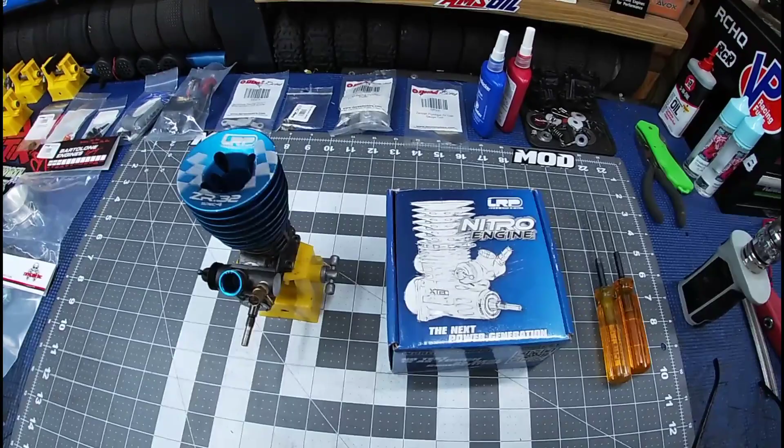For today, we're going to be breaking this down. This is the original LRP .32 Spec 4, stock, not modified, and this is the brand new LRP .32 Spec 4.1, stock, not modified. Let's open them up, see the differences. This is supposed to have an upgraded conrod, upgraded piston, and a turbo head with a better carburetor. So we'll take a look, see what's going on. See y'all in a few minutes. Peace.

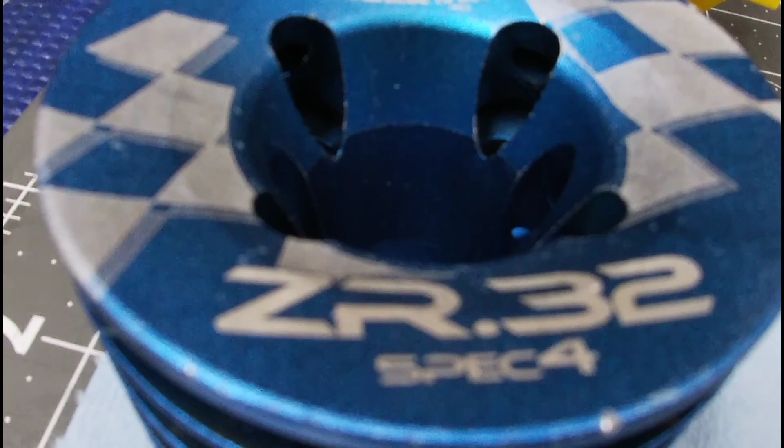People, let's check out the differences between the old LRP ZR .32 Spec 4 and the brand new turbo headed ZR .32 Spec 4.1. I know there are some differences, one major one being the turbo head, but we're going to check it out here in a second.

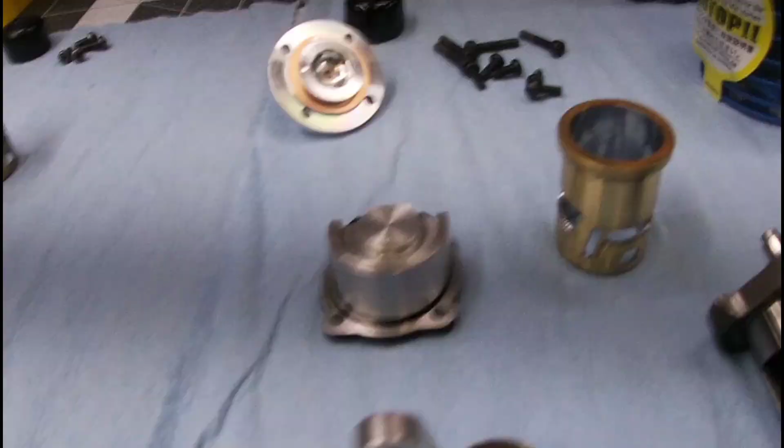All right, people, let's check it out. So what do y'all want to start with? Let's start with the cranks, man. So here's the old crank right here. Pretty sure the cranks are about the same, to be honest with you.

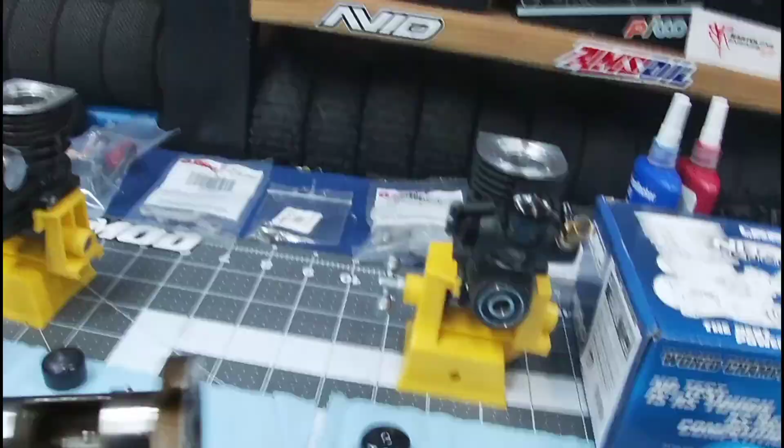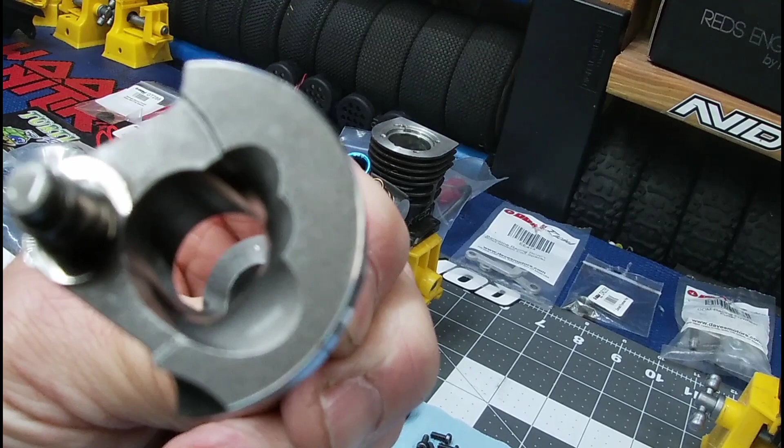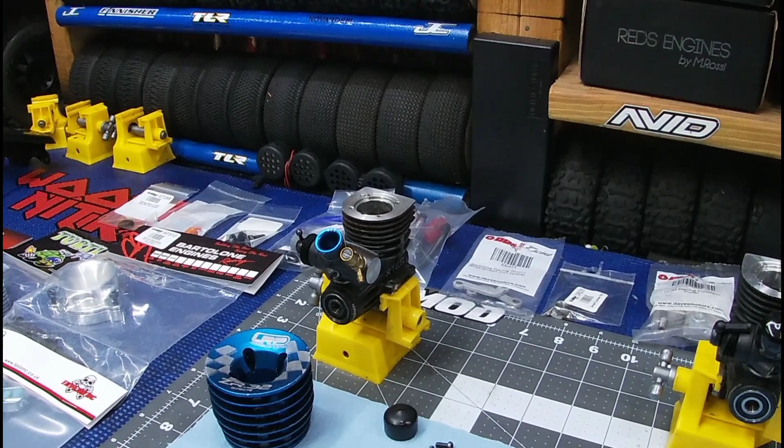No crank fill, nothing like that. It is ramped though. There's the new one. It's supposed to have an advanced timing on it. They look pretty similar to me, to be honest with you. Almost looks like the barrel. They're pretty much exactly the same on the cranks.

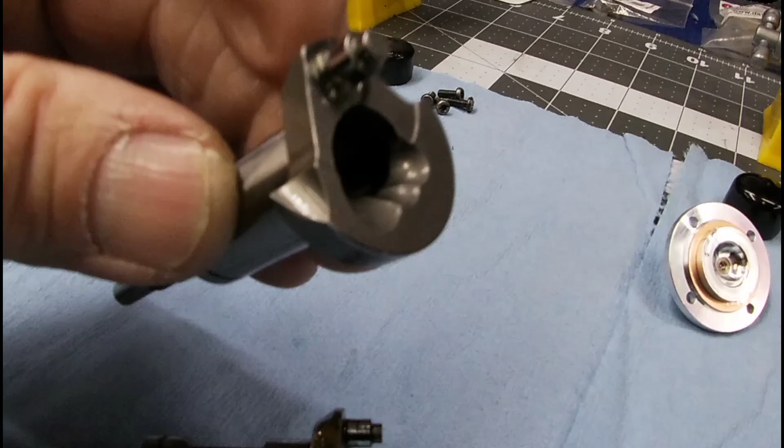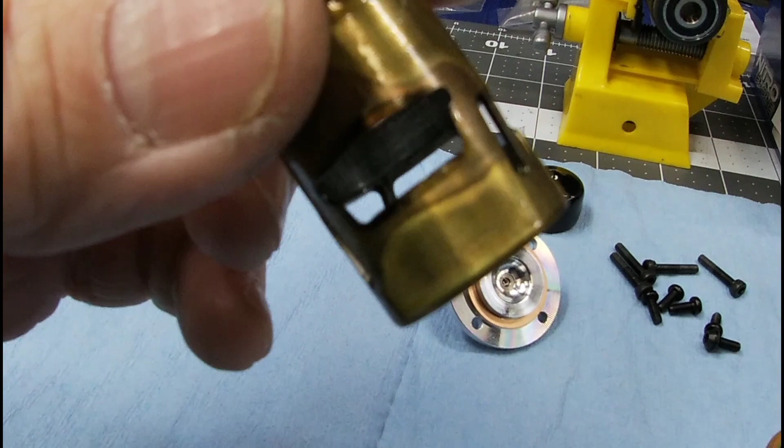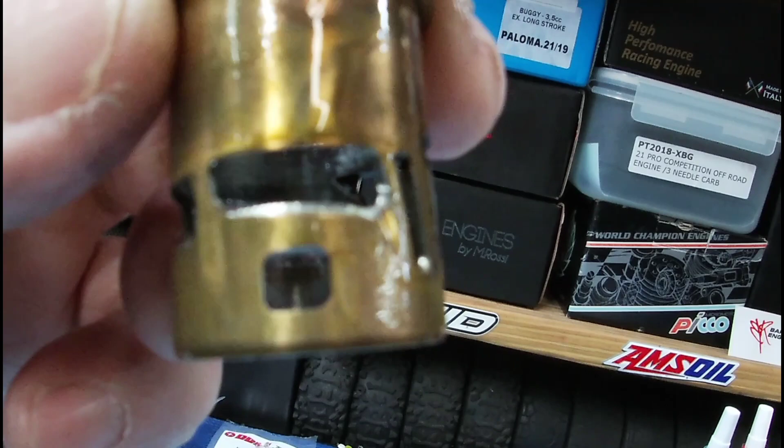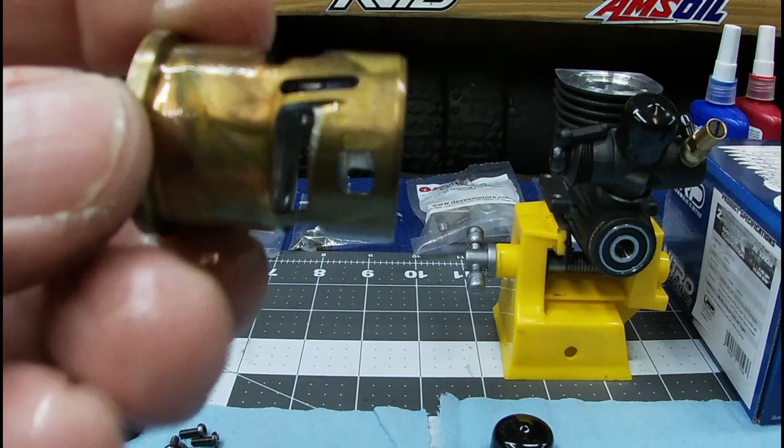All right, let's look at the old sleeve. This one's a stock one. It's got some pretty jagged edges in there. Yeah, I see a lot of burrs, man, a lot of burrs. Let's take a look at this one. Maybe cleaned up a little bit, but I still see some burring in there.

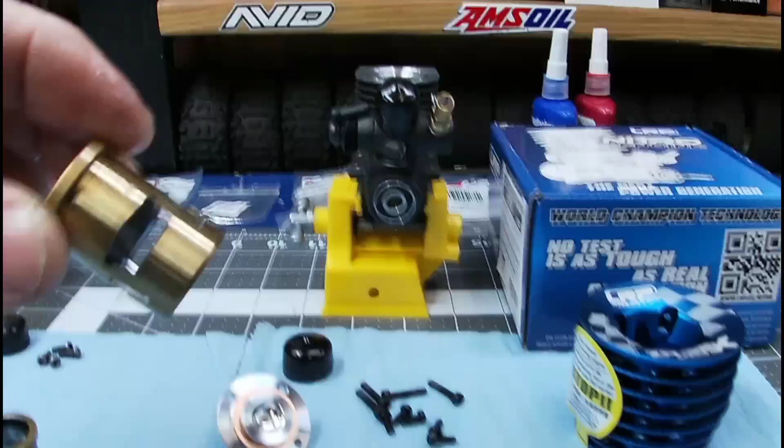Alright, back plates. It's the old one. Pretty much the same. Same thing.

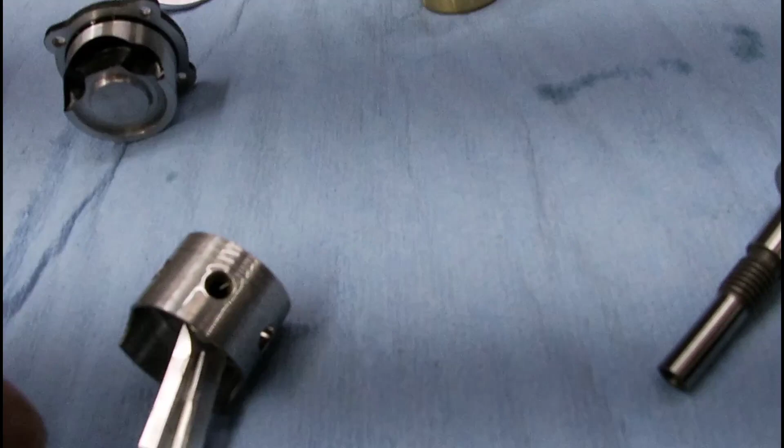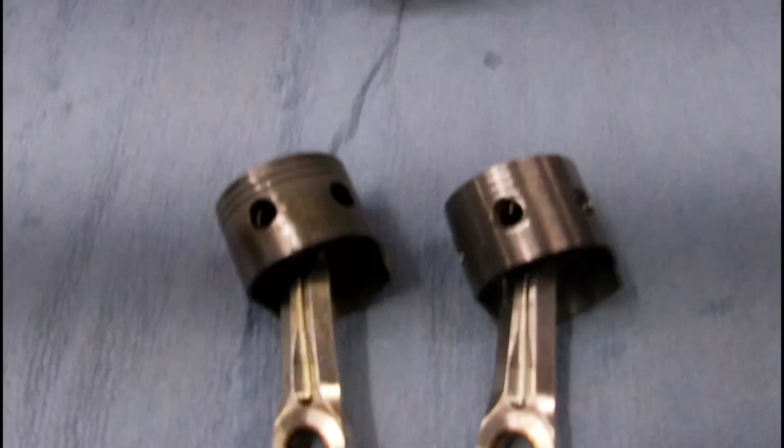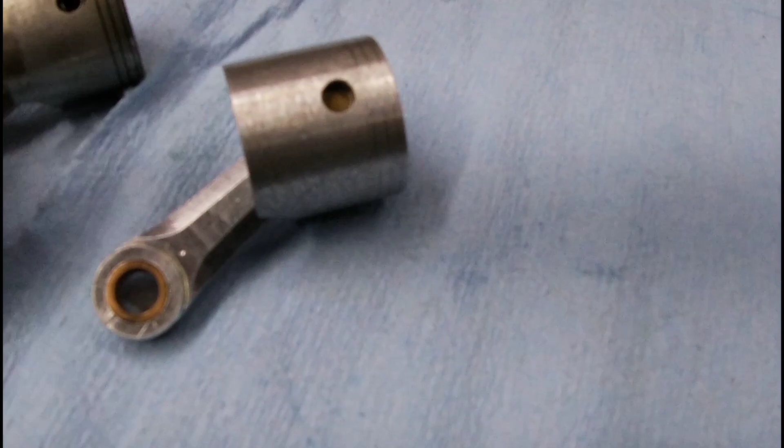Alright, let's look at this piston, conrod - and it's a big piston, man, look at that. They look pretty close, man. Maybe a different type of material.

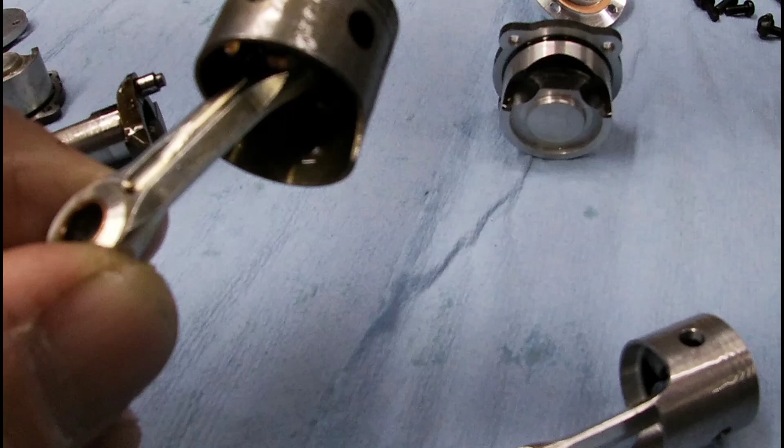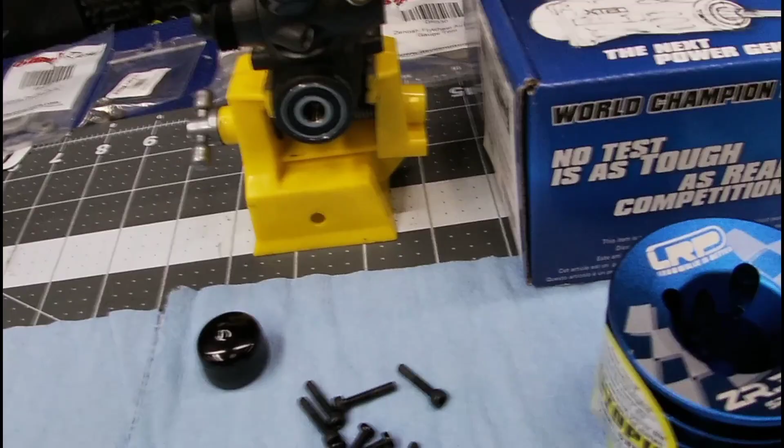Alright, and of course the turbo head, major change in this thing. It's running a number 5 plug. And of course, this one is just the regular standard glow plug, which I've had great luck with these, man. And the head is the same for sure.

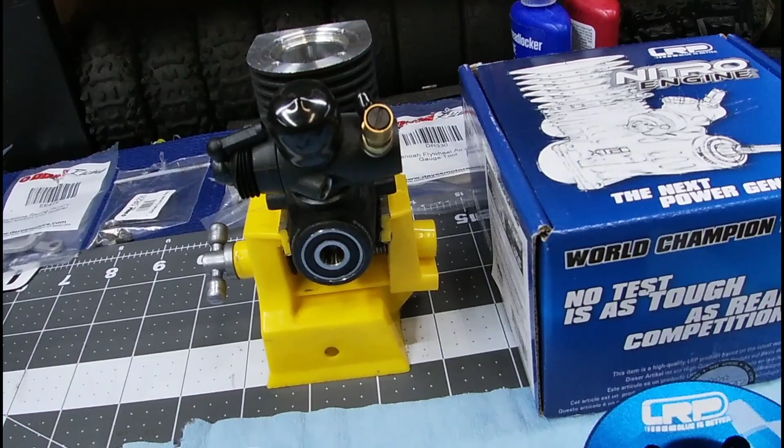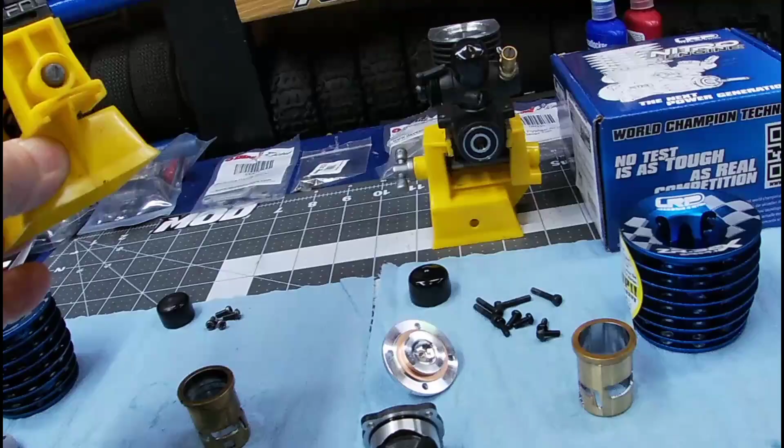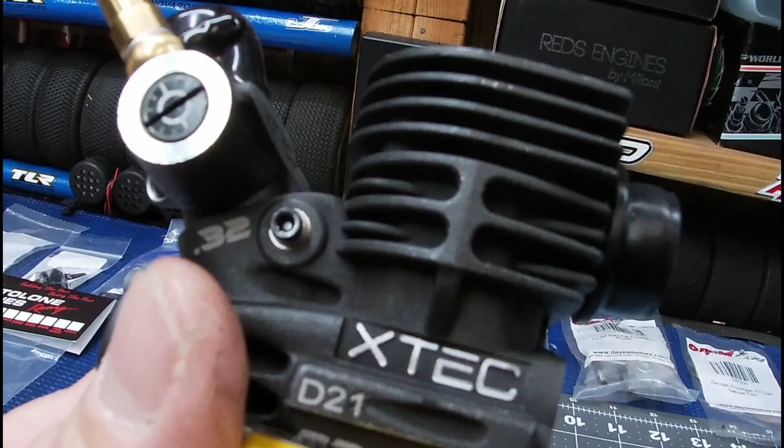So let's look at the block. There's some changes in the carburetor. So you guys know what the old block, the old carburetor, it's just a 2-needle carb. The new one, there's your 3rd needle right there, it's got the tick marks on it. That really looks like the exact same carb with just a 3rd needle. But we'll see - I think we're going to try and run it with the stock carb.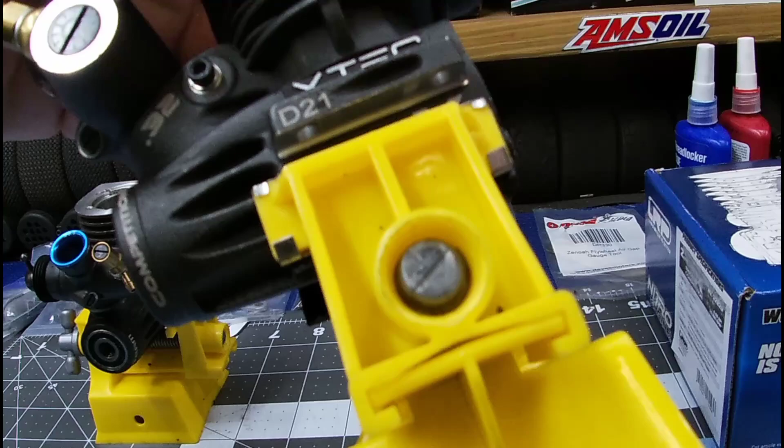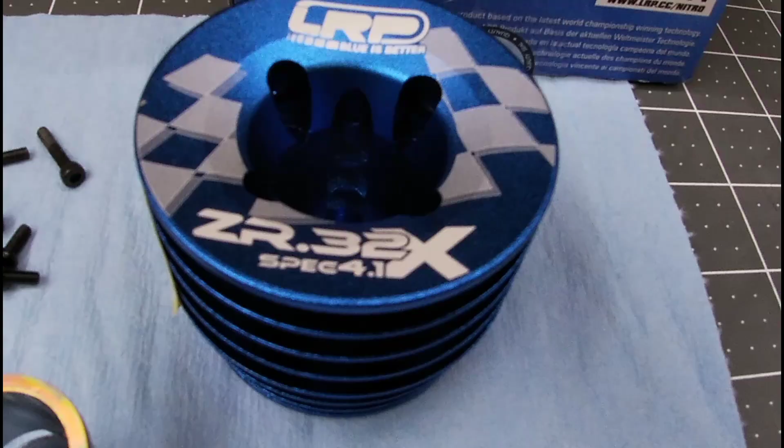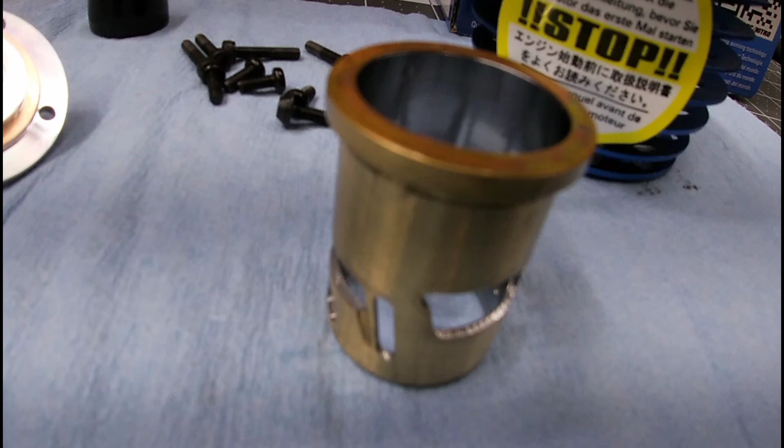They're really nice looking engines. It's a really beautiful head, milled out, lightened. But I'll be honest with you, other than a couple little things, the turbo head, and the third needle on the carb, I really don't see much difference, man.

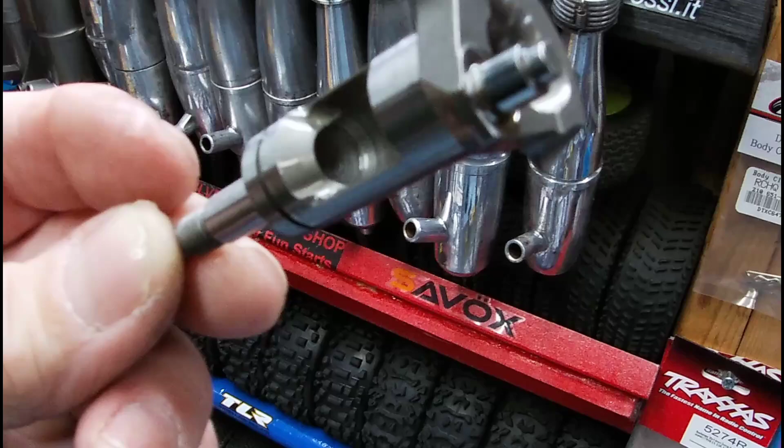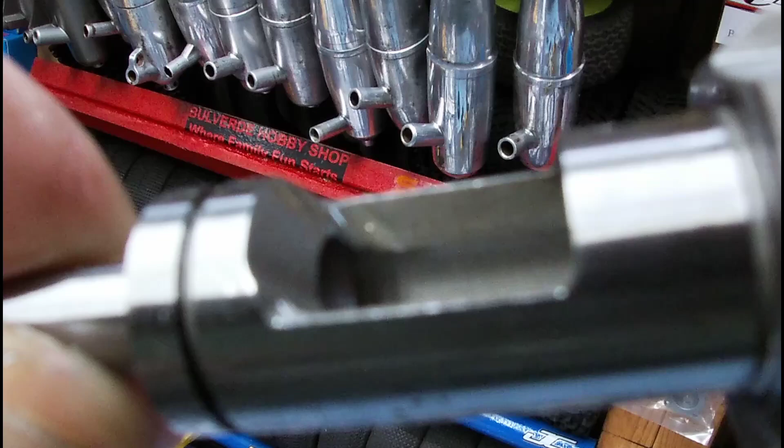That dang piston is huge, man. So we are going to get this thing modified, which will open up the timing. I think I do see a little bit more - yeah, I don't see much cut there in the timing area on the old one, a little bit. Looks like this one's been opened up a bit more, but pretty damn close to the same thing.

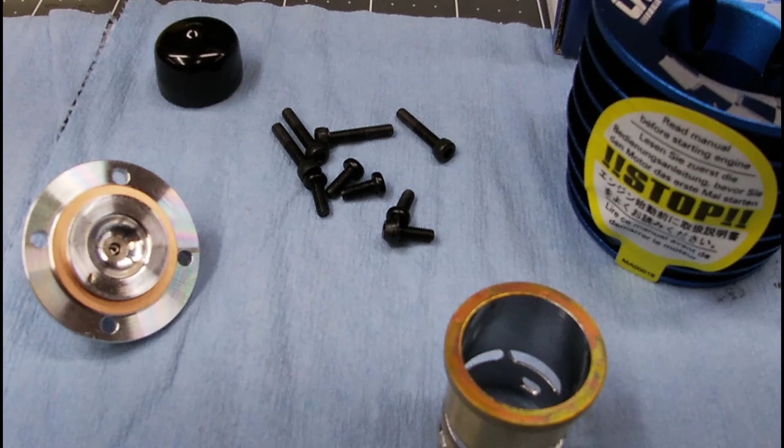But at least we got a turbo head on there, we can run different turbo head plugs. I'll probably run the LRP Platinum Iridium number 5 to start out with this, and let's see what it actually calls for.

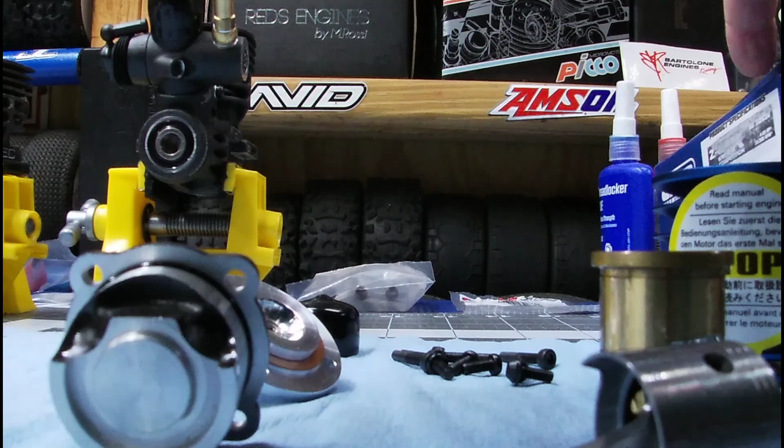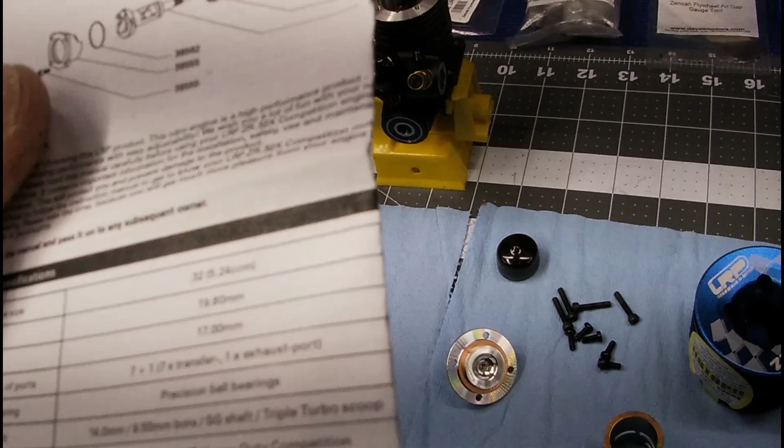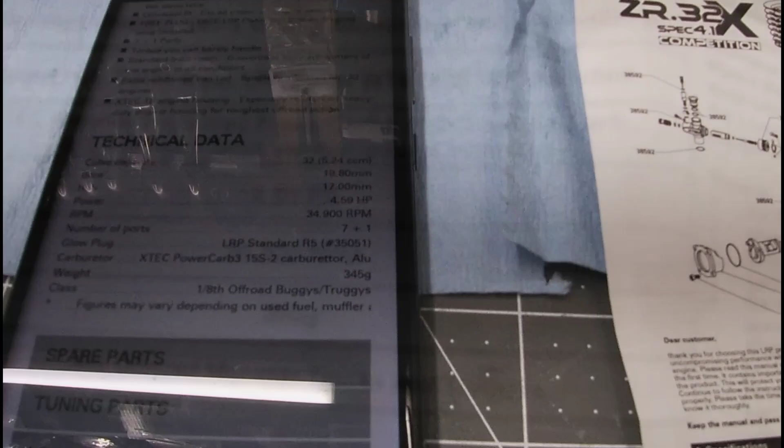So same old stuff in the LRP box - comes with a couple of Venturis, collet, sticker sheet. Let's see what plug it's running: super hot turbo style T4, okay, so it's a number 4. Oh, don't mess that up. Let's see what it says here: super hot turbo style WT4, part number 35145 LRP. Alright people, so let's look real quick.

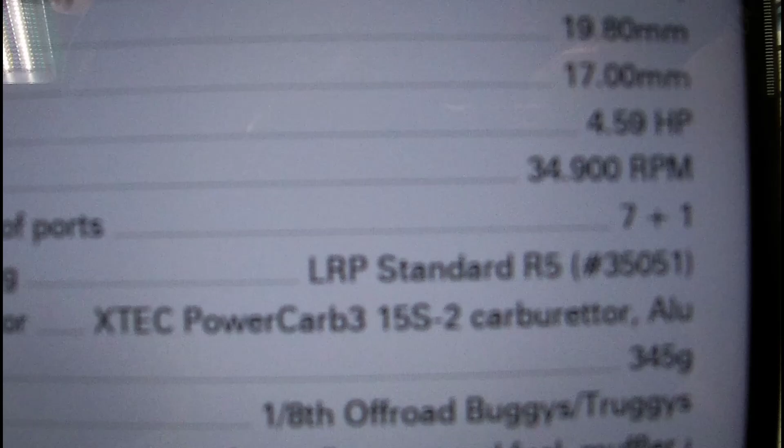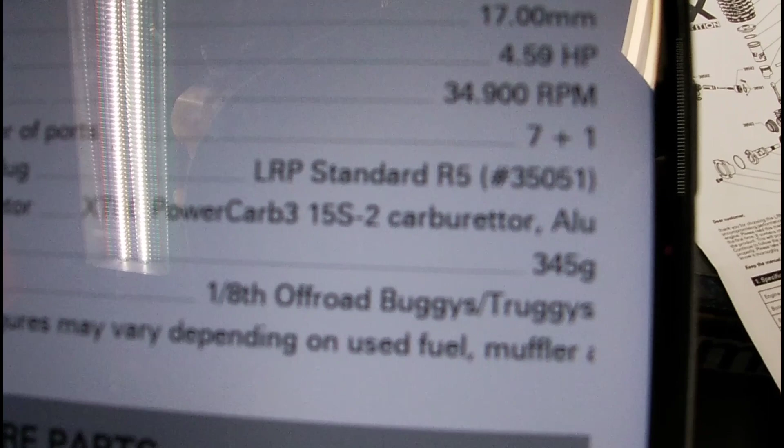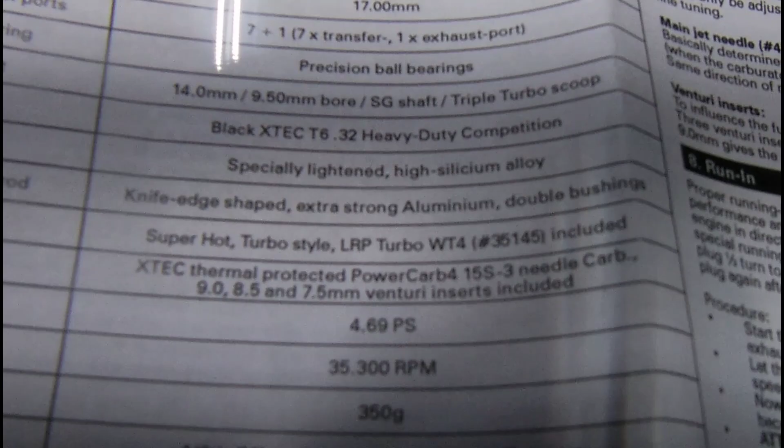So looks like we have cubic capacity 32, 5.24, which is the same on here, 32, 5.24. Bore 19.80 millimeter, hub 17 millimeter, power 4.59 horsepower... 4.89... 69, I don't know if you can see that, 4.69. This one is 4.59. Okay, so there's a little bit more increased horsepower there.

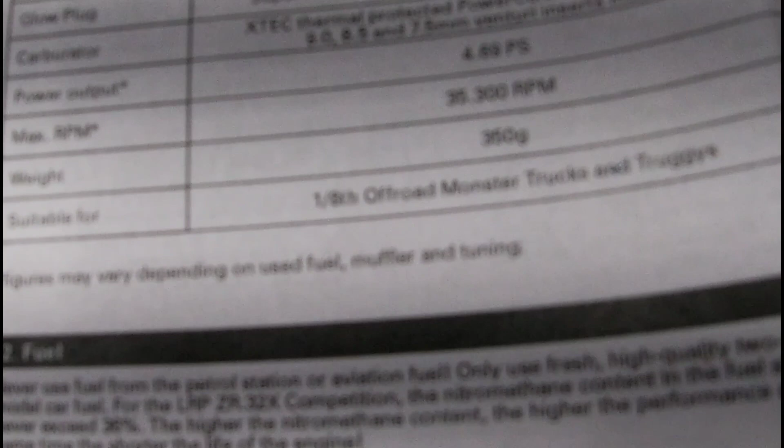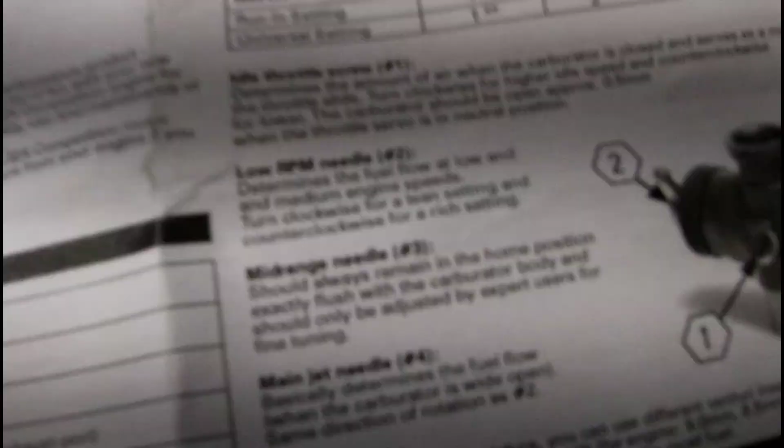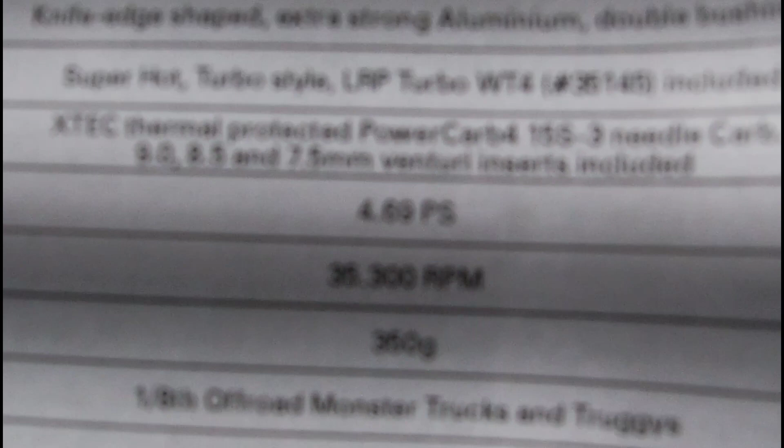RPMs, 34,900. RPMs, yep, 35,300, so it's a little more RPMs here on the Spec 4.1 - 35,300, so it's a little more powerful. So you can see that one's 34,900, 4.59. This one, it's kind of hard to see - 35,300 and 4 point, I can't see it, 4.69 right there. So it does have a little bit more power, not much.

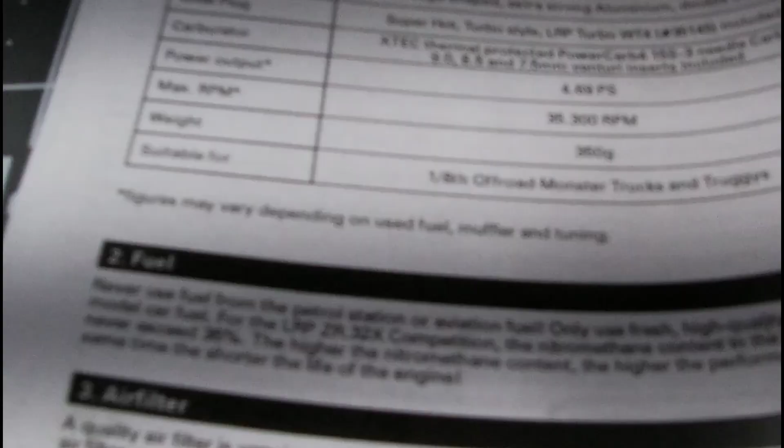Same port, 7.1, glow plug standard R5, carburetor XTEC carb, weight 350 grams. It's a little bit heavier, the new one's a little bit heavier, 350 grams. This one's 34, or what's this one - 345 grams. So this one's a little bit heavier.

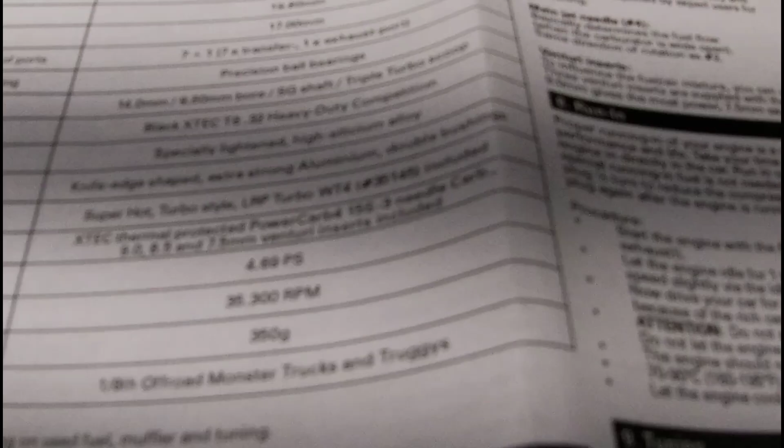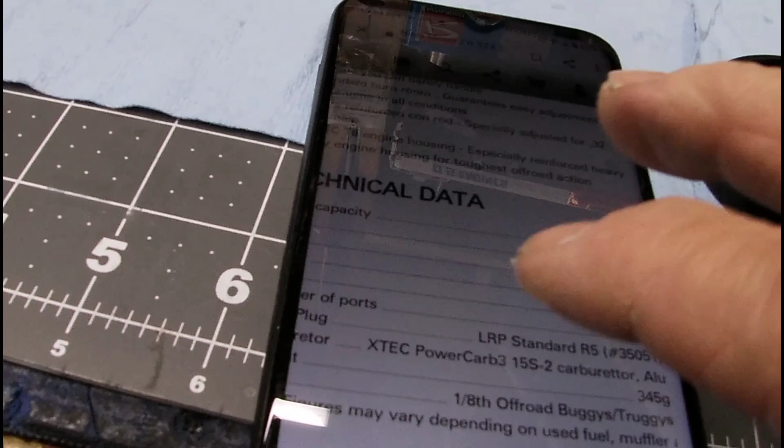What's our carburetor? Thermal protected PowerCarb4 15S-3 needle carb. This is the 15 S2 needle carb. Specially lightened high-silicon alloy on the rod. Doesn't say anything about the rod on here.

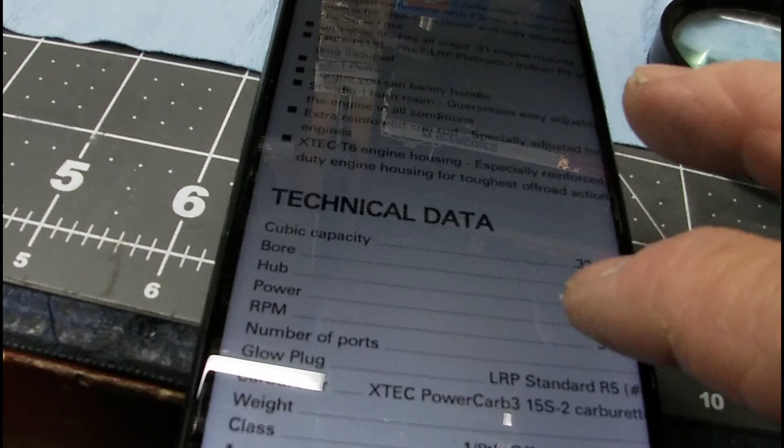Alright, so there are a few differences, including the turbo head on the Spec 4. So alright people, I think that's going to be about it.